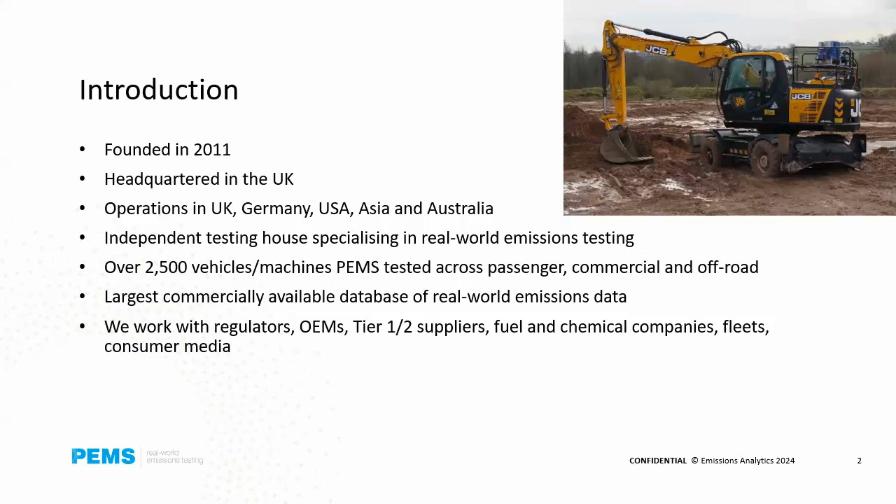To the extent of we've now tested over 2,500 different vehicles and machines. Numerically, the greatest number there are cars and vans, but there's a growing number of off-road machines in there as well. So we're not just doing it for third parties, but we are backing that by doing it ourselves as well and making that data commercially available. And we work with everyone up and down the supply chains and researchers and the like. So I guess the message from that is we're not just a simple test house. We are actually passionately interested in this area, and we build these bodies of knowledge and like to work with everyone.

I mean, in specific terms, the bread and butter of what we do is many of the regulatory certification, surveillance type testing that is in Europe and is increasingly over here as well, extending that as well to things like retrofit accreditation. That tends to be schemes that come and go, that are government driven, that can be very intense for a period, and then finish, but we are able to deliver those sorts of accreditations, and we've done a lot, for example, around bus retrofitting in the UK.

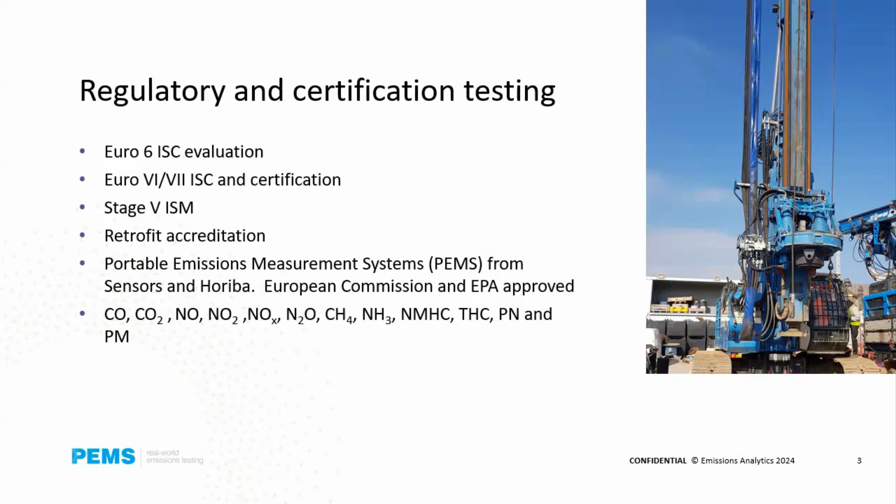We run standard PEMS equipment from both Sensors Inc. and Horiba, which meet all the usual requirements and the standard pollutants, but also, and which will be a segue into the second half of my presentation, currently unregulated pollutants and even species which would be in the category of emerging substances of concern. So I'm going to take you through very quickly three areas. So construction, what we do in construction, what we do in marine, and then specifically looking at alternative fuels, and then I'll wrap up.

So, we cut our teeth on the off-road testing, as I mentioned briefly at the beginning of yesterday, with a big construction project in London, which was at the time the largest construction project in Europe, around redeveloping Battersea Power Station, which actually you can see there. If there are any Pink Floyd fans in the audience, which I hope there are, that is the building that's on the cover of the Animals album from 1977, and was a power station in very central London, bucketing out noxious emissions right in the centre of London until it was finally decommissioned, I think in 1981.

And it sat there derelict for a long time, very contaminated site and very difficult to regenerate, but extremely iconic. So you can imagine the planning and zoning agony that went through. But finally, about 10 years ago, they got through that, and it then became this very large construction project. So what we did, we worked with King's College and Imperial College in London, and we were able to get access to pretty much all those machines on that construction site over about a 3-year period.

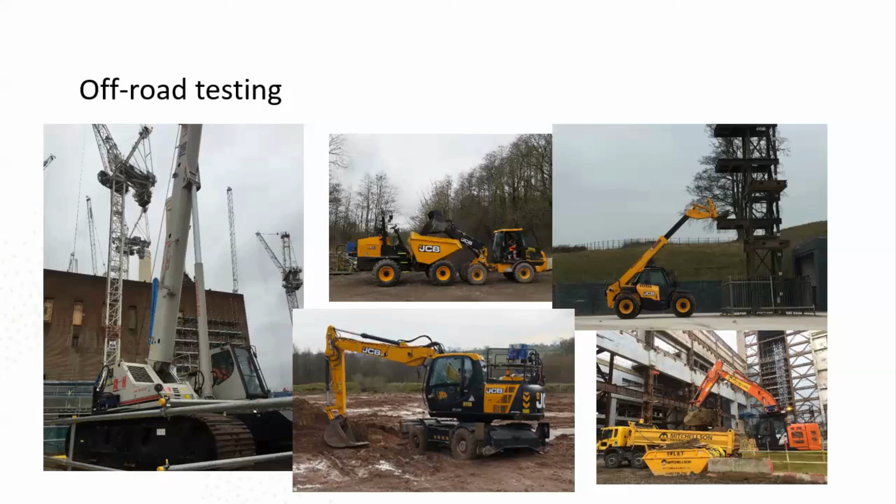So I put that up to give you a sense of the scale of what we're able to do, and the ability to go into pretty challenging locations and test on vehicles of all shapes and sizes. And from the body of data we built up, by owning all this data, we were able to understand, in this case, the work-specific NOx emissions across that range of vehicles, segmented by the different regulatory stages, in this case Stage 3A through to Stage 4.

And we were able to see the reduction, so by Stage 4, a 78% average reduction in the NOx emissions, for the reasons you'll be familiar with, but also to understand the uncertainties within those categories as well, and to see the outliers. So whereas most of these pieces of equipment were clearly compliant or within margins of error, we were also able to pick out where there were either potential compliance issues or intersections between equipment and duty cycles that perhaps were not captured in the regulatory framework, to flag to regulators potential problem areas.

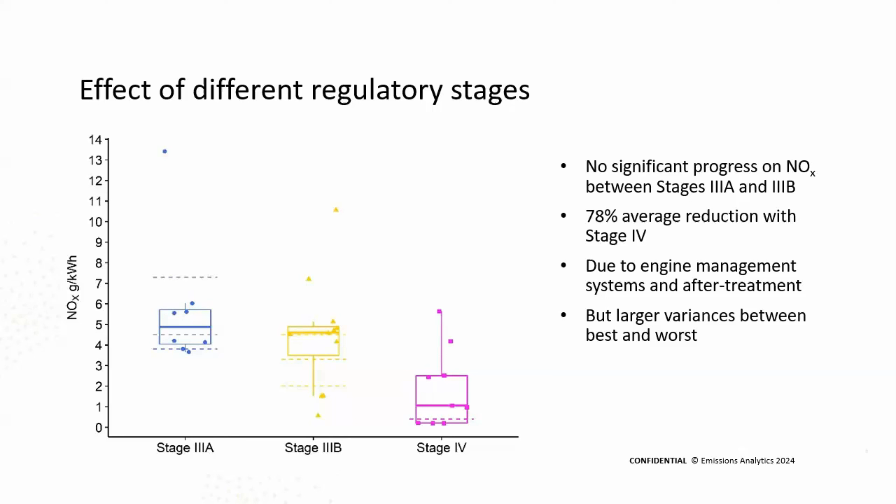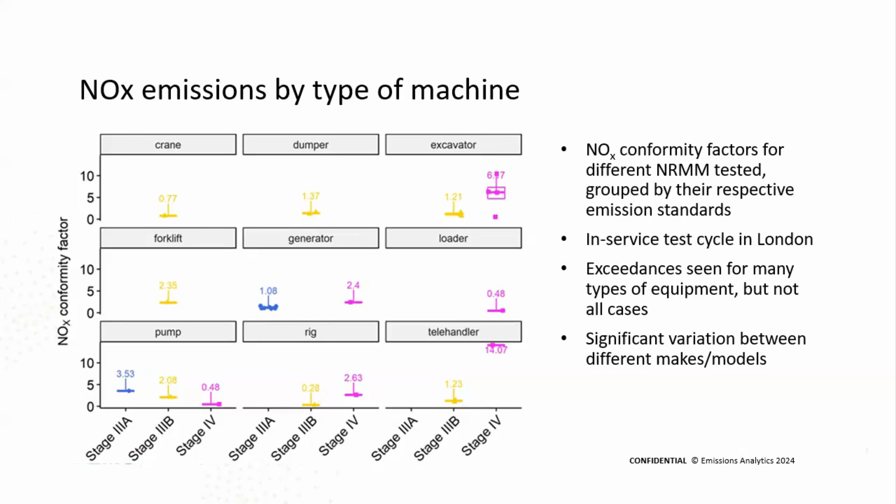So that sort of data came out of that work, and we can also segment it in a different way, in this case between the different types of equipment. And you could see it starts to pick out certain problematic areas. So within the excavator group, even within Stage 4, there were much higher average emissions than perhaps expected, and the trend over time was not in the downward direction. Now, clearly, even though we tested a lot of vehicles, there were sample size limits here, hence showing you the variabilities. But that's the sort of depth of the data and the ability to analyse it that we have.

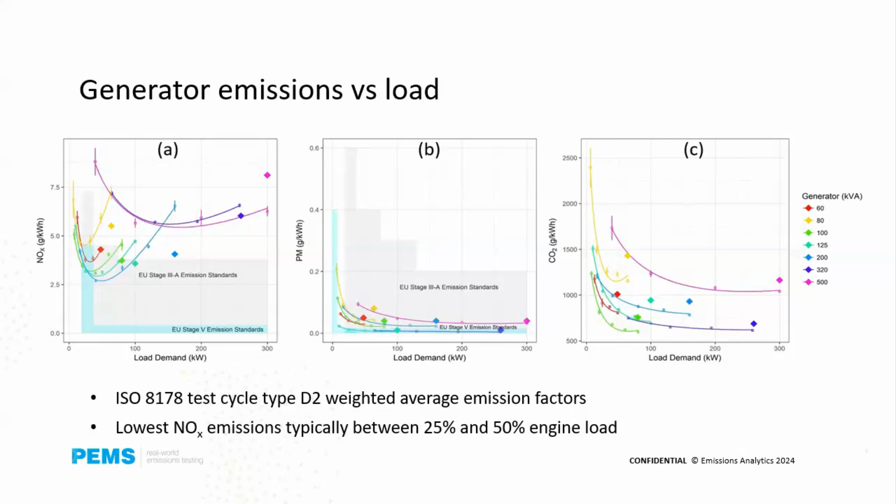Slightly easier to test were the generators on site, and here are three different pollutants from generators: NOx, particle mass, and CO2, testing on the ISO 8178 cycle. We're able to see the relationship between the demand, the load on the engine, and the emissions for the different generator capacities. So the message here is not about any one specific result, but the ability to originate this sort of information in real-world conditions.

Second part of the construction, and just to broaden out from that one project, we work extensively with the Centre for Low Emission Construction, which is a centre of expertise in London that may be useful to be in contact with if you're not already. It's part of Imperial College, a real centre of expertise on how to reduce emissions in construction. So, not to go through the details in any depth, but in this case, testing retrofit technology here, being certified by the Energy Saving Trust in the UK.

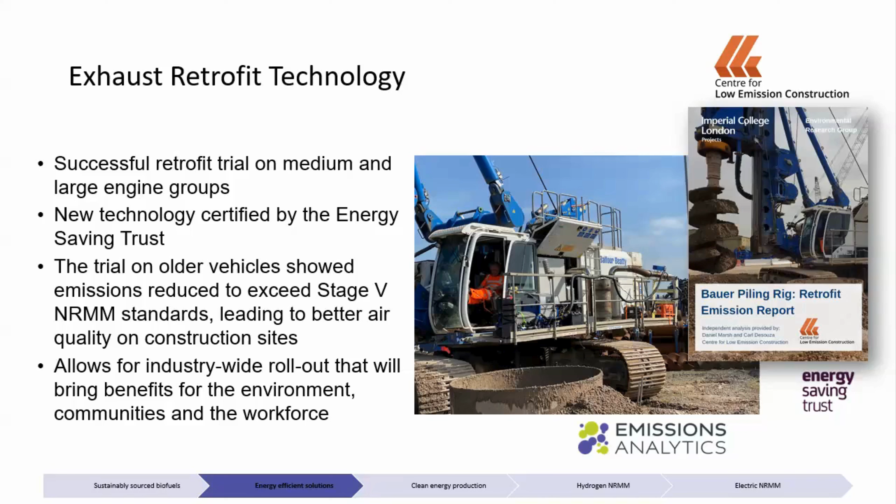And this was part of the construction of what's called HS2, which is a high-speed rail line cutting through the centre of the UK. It's astonishing how much of a meal the UK makes of building railroads, having pioneered it in the first place, but there we go. But, to the credit of the UK, there was a great deal of attention to how low emission all the construction around that rail system was.

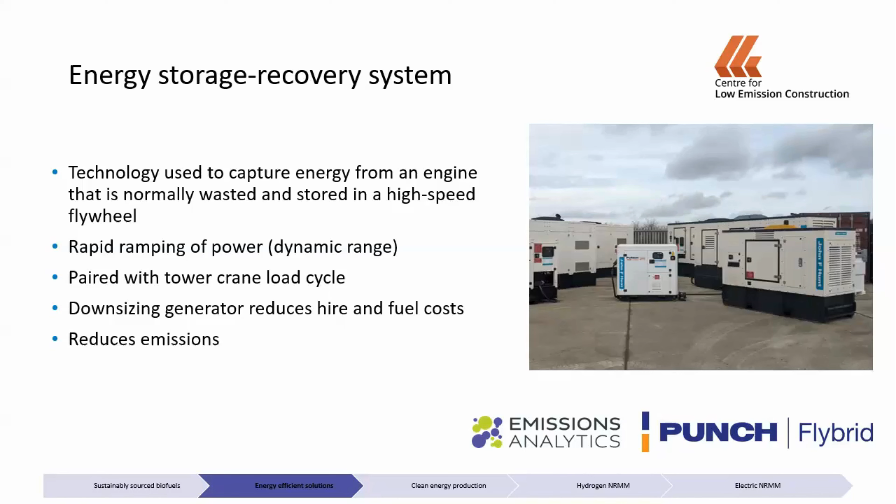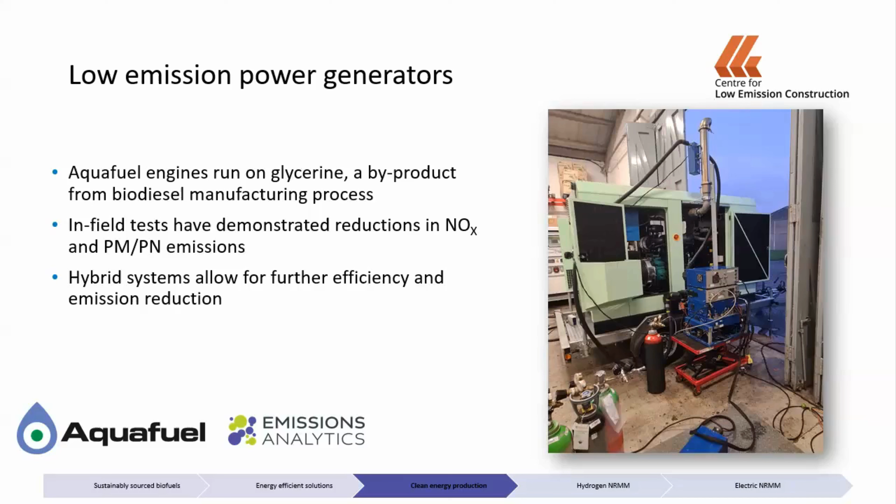Then we also, with Punch Flybrid, did analysis of an energy storage recovery system, and also some low emission power generators with a particular innovative technology from Aquafuel. So again, it's not so much the specifics of the particular technology, but the ability to go into the field and test something of almost whatever shape and size or innovative fuel, and evaluate its benefit. And that's also where the database we developed comes in, because it gives us a very useful baseline reference point when we're trying to assess these new things. So that's the construction side.

Moving on to marine, I should say PEMS-based testing is not easily applicable to big marine. There we tend to confine ourselves to taking samples on tubes, or other fixed collections, so we can do laboratory analysis rather than real time. Having said that, we're able to practically do marine vessels up to this sort of size. So this is the Thames Clipper, which goes right through the centre of London, taking people between the West End and out to the O2 music venue in the east. It's currently called the Uber, since Uber is currently sponsoring it.

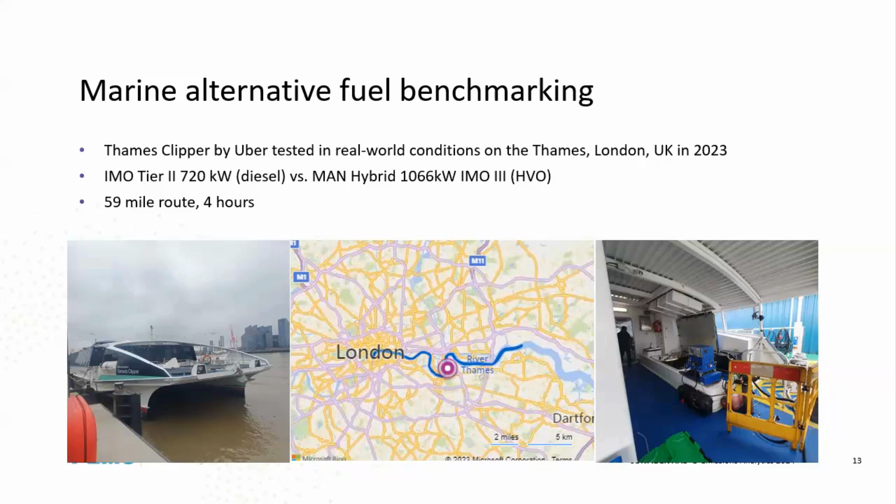So we were asked to see whether switching to an alternative fuel, in this case an HVO diesel, would deliver significant CO2 savings. This was done last year, and it involved a 59-mile route repeated over 4 hours, as you can see, cutting right through the centre of London.

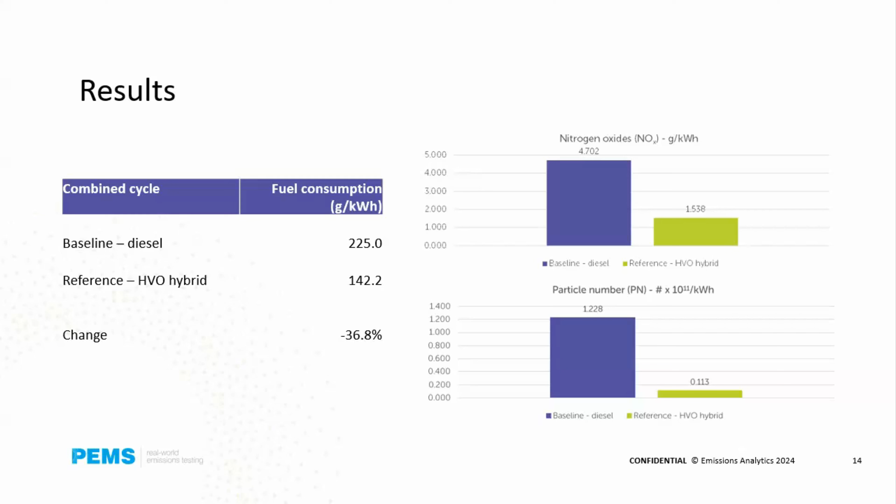And the results were, again, we were able to demonstrate significant reduction in NOx emissions on a per kilowatt hour basis, and an even greater proportionate reduction in particle number emissions, and indeed a quite substantial reduction in fuel consumption. Because this was not just HVO, but interestingly, it was a combination of HVO with a hybridization system. Obviously, you would not have got that reduction on its own, but that was the nature of that combined technology, and it was interesting for us particularly by bringing together hybridization with a renewable fuel.

The second marine application we did was, again, coming back to the earlier days of the Industrial Revolution and how Britain pioneered it. In London, the Victorian drainage system was pioneering in its day, but has turned into a real Achilles heel for the UK, because our foul drainage system can't cope anymore with the population in London. So about 8 years ago, maybe slightly longer, there was this big new project for creating the big new sewer for London.

It's called Thames Tideway. More colloquially, it's called the super sewer, and it is a sewer, and it is big and great. And it actually runs almost exactly the same route as we were doing the Thames Clipper on the water surface. It runs along the embankment, and it is this vast east to west sewer. So you might ask, why are we involved in transporting effluent?

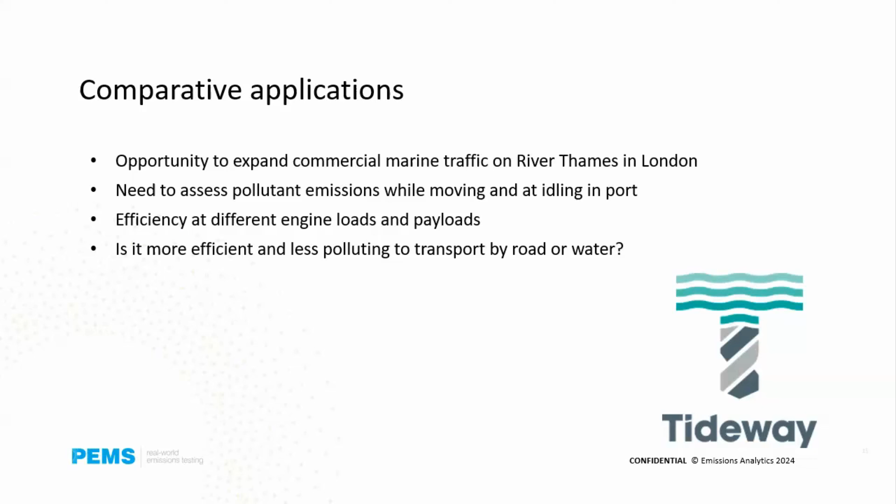Well, the reason is, in excavating this big sewer, the amount of spoil and earth moving that was required was enormous. And the environmental concern there was, how do we get rid of all this earth in the most environmentally friendly way? The default was to put it on trucks and drive it somewhere, probably out to the docklands in East London, and dump it. But they wanted us to look at whether it was better in terms of CO2, fuel, and noxious emissions to put it on barges, and use the Thames itself as the way of getting rid of it. And these were the barges that we tested.

In this case, they were dual engine barges, and we were able to PEMS test both engines separately. Obviously they were pulling big barges full of mountains of earth. It's a really interesting, very challenging project, obviously with the wet conditions. But the headline result was, actually, the barge does work in certain circumstances. The barge is the best solution if you're pulling a lot of stuff.

So if you're pulling hundreds of tons, and also if you are not pressed for time. If you're happy to pull a lot very slowly through London, actually that is the best way of doing it. But if time becomes a pressure, or if the nature of the excavation means you've got more frequent lower amounts, it does not make sense, particularly from a CO2 point of view, to do it by barge. And what happened midway through the project was most of the truck fleets that were the default case upgraded from Euro 5 trucks to Euro 6 trucks.

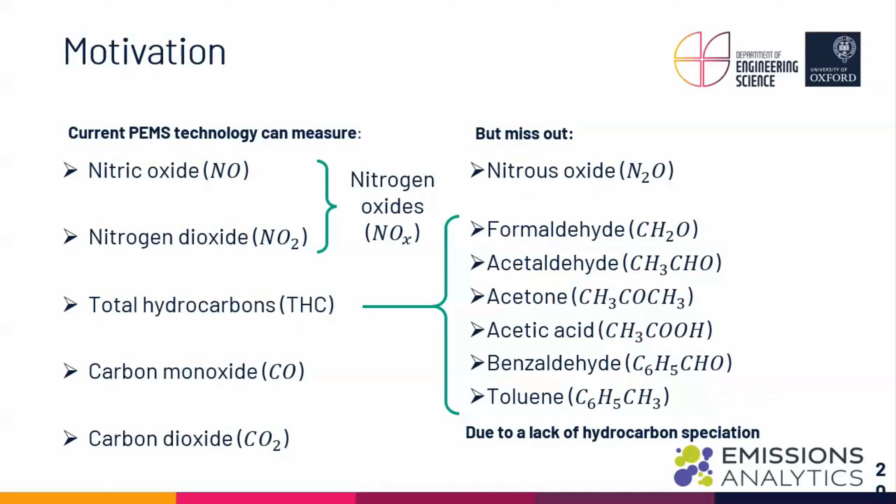We were interested in doing an untargeted analysis. So what is it there that we might not know is there, or that we haven't thought about might be a concern? The point is this is generic as well. It's not about finding out E10 specifically. As we push it up to higher than 10% ethanol, or introduce other feedstocks into renewable fuels, how can we come up with a generalized method for screening for new nasties or for quantifying specific unregulated pollutants of concern? That's what this is about.

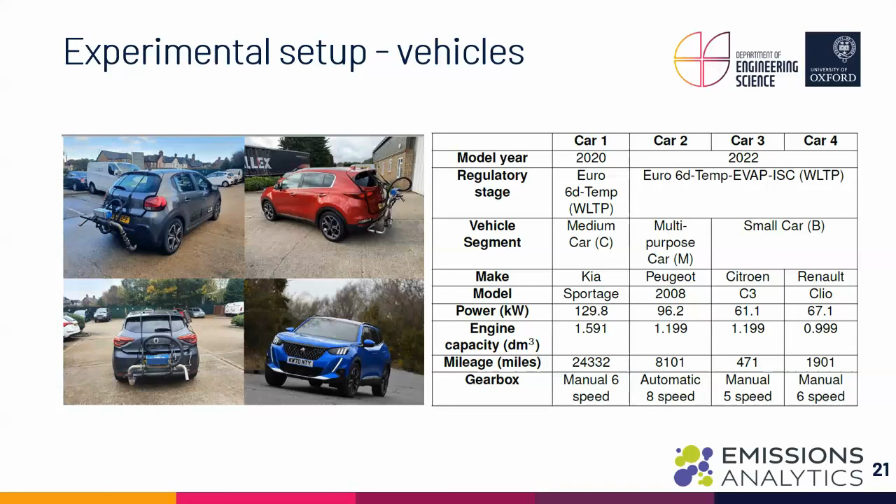What I'll illustrate here is on 4 passenger cars. This could equally be 4 pieces of construction equipment or on-road trucks or whatever. It's a totally generic setup based upon standard sensors, or could be Horiba, AVL, a PEMS unit on a car, on a vehicle in the normal way.

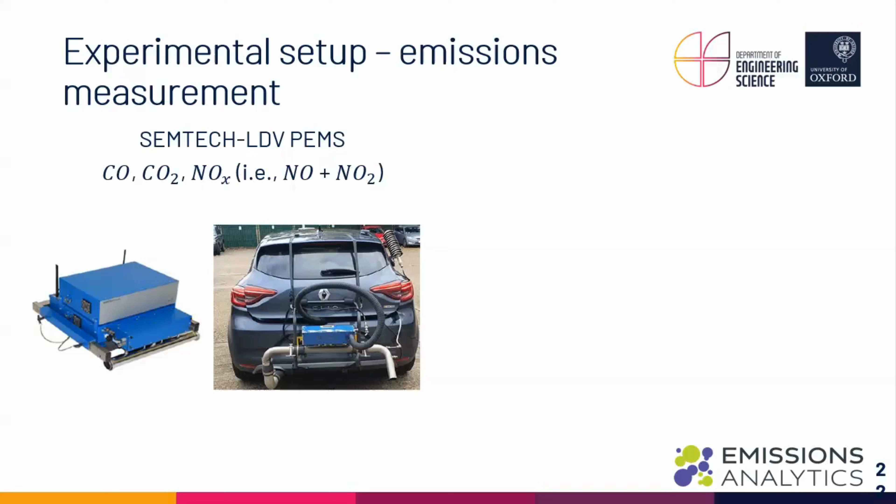But then adding to that, we have developed a proprietary sampling system, which is a proportional dilution system, which samples off the flow tube and onto a bank of thermal desorption tubes and other absorptive materials, and crucially on a geofenced basis.

So if you look carefully here, you've effectively got a matrix, a 4x4 matrix of tubes. You set up the test with up to 4 geofenced areas. In the first part of it, it'll sample onto the first 4 tubes. The reason there are 4 is you have one set up for more volatile, one for less volatile, and you can have a molecular sieve for N2O, or a DNPH cartridge for formaldehyde. So you can choose what tubes you put in those 4 slots.

But then, crucially, once you get to the end of the first segment, let's call it the urban part of the driving, it will automatically flip at that geofence location to the second bank, which maybe is the rural section. And then again it'll flip to the third bank, which could be a motorway section, or you could have one as a cold start section. So you can flexibly set that up, compensating for the fact that it's not real time. It's pseudo-dynamic, in that you can partition the data in that way.

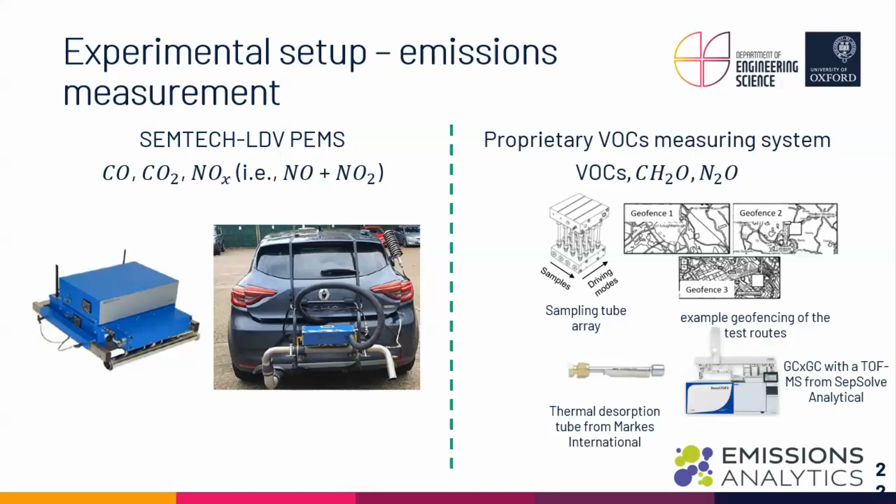Then at the end of the test, you take all the tubes out and subject them to, in our case, a 2-dimensional GC with time-of-flight mass spectrometer, so we can do this untargeted separation, identification, and quantification at very low concentrations. This is very sensitive and selective, down to parts per billion, if not lower. So if you're trying to pick out trace levels of particularly noxious chemicals in real world operation, this is the best way we believe to do it.

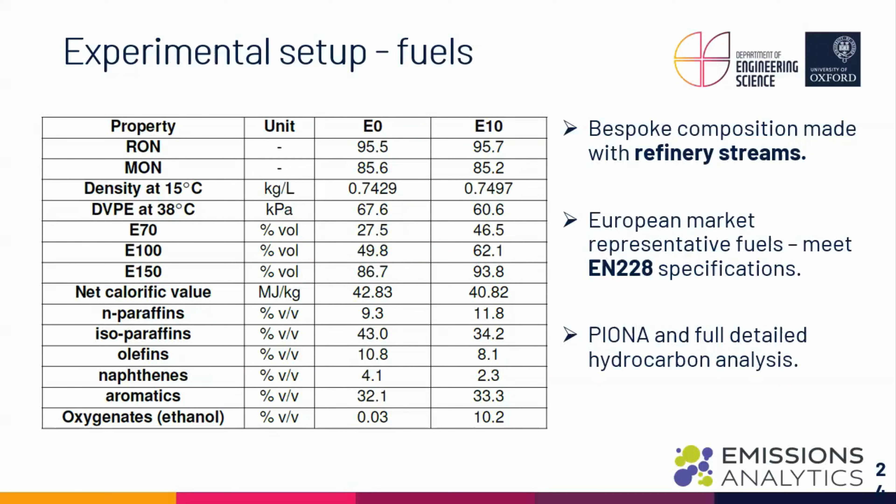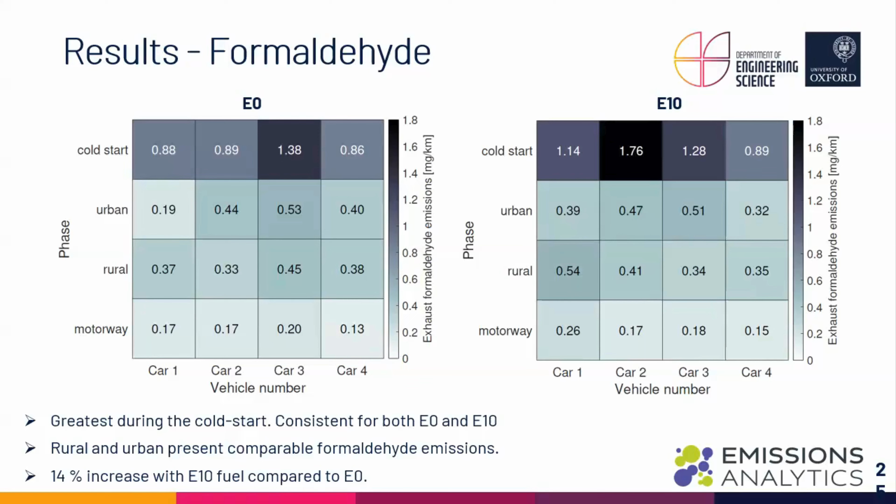On average, there's a 14% increase in formaldehyde on the combined cycle between those 2 fuels. Then we started looking at other aldehydes, and particularly acetaldehyde, and the precursors to those as well.

We also looked for other things, acetone for example. I picked this because it's relatively common, but in certain concentrations it's an irritant, and it can also lead to cognitive impairment, dizziness, that sort of thing.

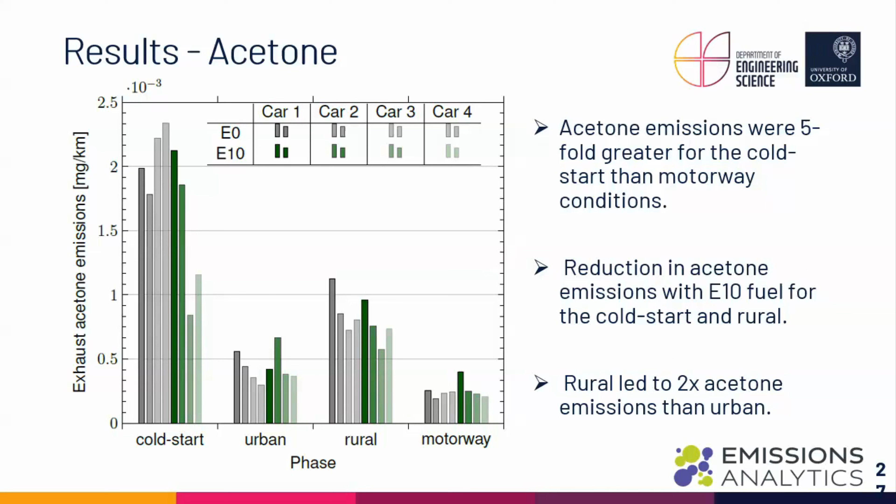Again it shows the dominance of the cold start part, and rural driving—relatively high speed but dynamic driving—is quite high as well. But systemically between the two fuels, there was not a great deal of difference.

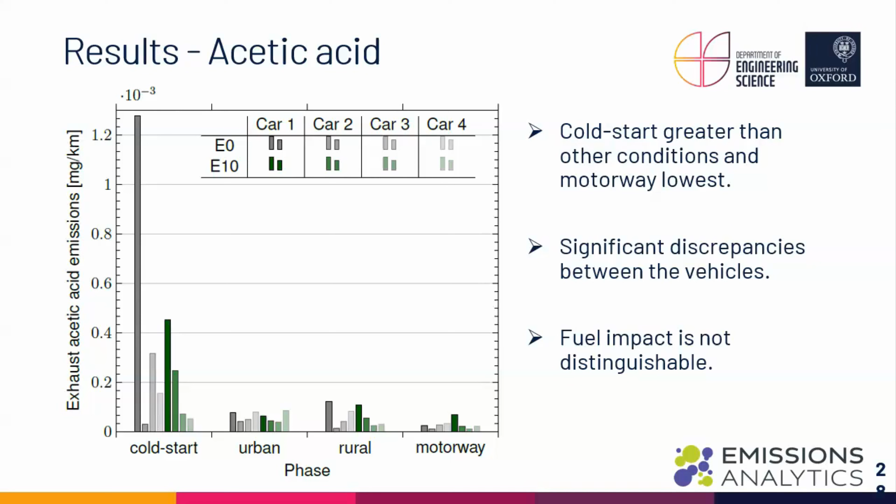Acetic acid, why is that? In very crude terms, acetic acid is not good because it leads to acidification of the environment. A similar pattern was seen, but we picked out that car 1 had particularly high acetic acid emissions. Again, between the two fuels on the average level, there was no significant difference.

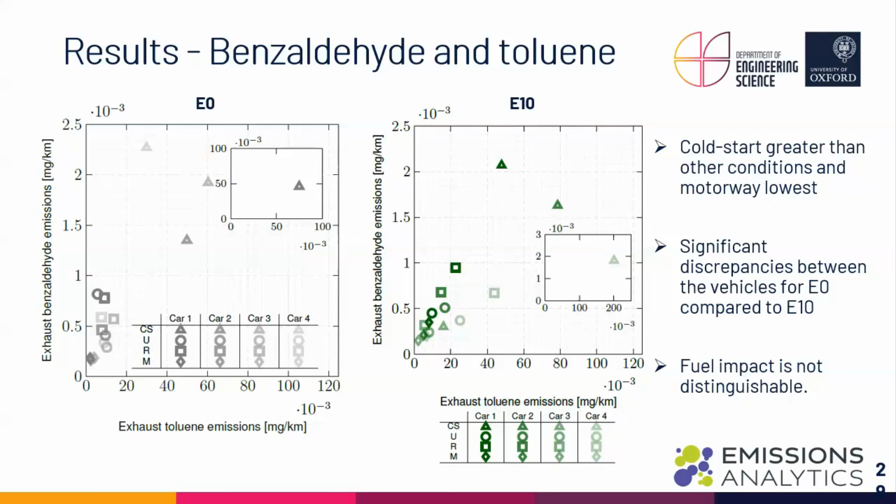Thinking more about other aldehydes and also toluene, charted here to show how those two things are potentially interlinked in their formation. We have charts with toluene emissions on the horizontal and benzaldehyde on the vertical. Again, cold start dominant, with quite significant differences between vehicles, but on average no significant difference between the two fuels. That's the VOC side of it, and the final main unregulated, or in some cases soon to be regulated, pollutant in real world conditions is nitrous oxide.

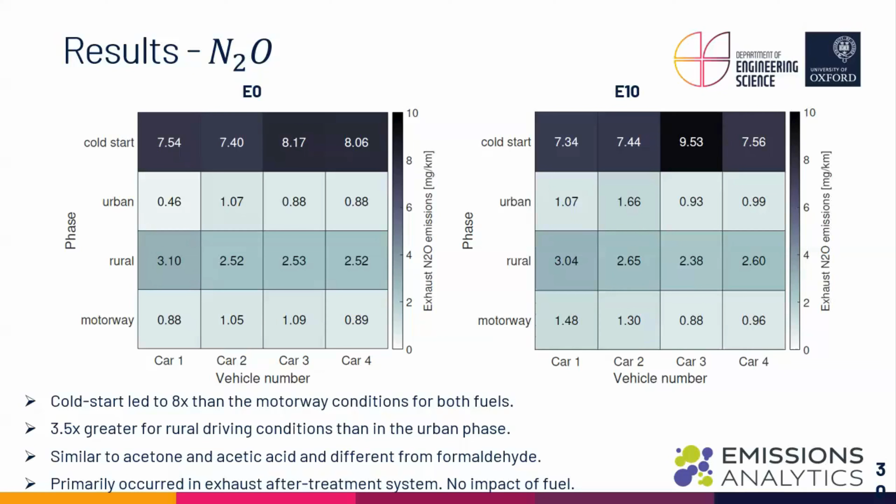There are other technologies which have been introduced to measure N2O in real world conditions, and which are absolutely valid. But what we're getting here is N2O along with all the other things. And actually, we're able to separate and identify something around 150 to 200 species of VOCs in this test. If I went back to the raw data, there's a long list of other pollutants we've identified. So if your question is the other way around—can we see compound X in real world operation—that's where the untargeted analysis comes in.

So those are the three areas: construction, marine, a bit of rail, and alternative fuels. What I'd like to leave you with is that we've developed and taken real world testing and tried to push the boundaries of it, trying to bring to real world testing stuff that has often been the preserve of the lab due to the challenges involved. We've demonstrated that real world testing enables us to look at a wide range of pollutants, whether regulated or unregulated. Physically and logistically, quite a lot of this is challenging, but we've shown it's possible, and I confess there's part of me that likes pushing the boundaries of what is possible and testing things that may not have previously been easily testable.

We do official testing, as mentioned—the ISC, that sort of part—but it's so much more than that as well. It's about the R&D, it's about looking at what the new emerging pollutants of concern are. It's not just about turning out what's required by the law today. Not least, and that applies to the fuel side as well, being able to see what the real world effects are. We can also, as an aside, do exactly the same 2D GC to the original fuel itself and link the relationship between what's chemically in the fuel to what comes out of the tailpipe.

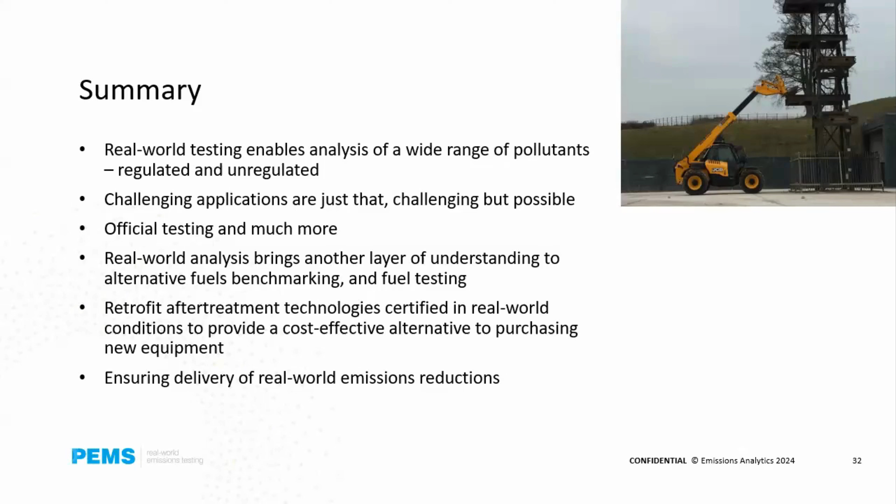The off-road sector has been so much more successful at that than the passenger car segment, as we well know, and long may that be the case. But it requires surveillance, awareness, and constant questioning of what's going on. Are all these new technologies we've heard about over the last couple of days, are there any hidden downsides? Are there things we need to worry about? Are there potential other upsides that we're not focusing on yet that we can drill into? So it's thinking beyond just the narrow confines of what we have to do, and what else can we find out and be conscious of to make sure we ultimately do the right thing.